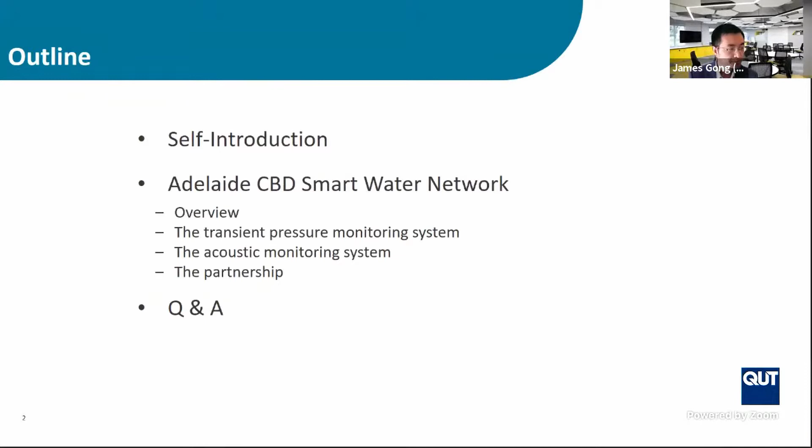So I'll start with some background information about myself. I did my PhD at the University of Adelaide and did my postdocs there as well. Moved to Deakin University last year, June last year, and have been here for just over 1 year. In terms of my background, my PhD was in hydraulics, in particular for pipeline hydraulic simulation and analysis. So that's water infrastructure, which is slightly different from the bridges and buildings most colleagues are working on.

Then I've done pipe condition screening technology during my PhD, and that has been commercialized through a company, Detection Services in Australia. And during my postdoc, I've worked with South Australian Water and also the University of Adelaide, developed a pipe break early warning system, trying to find early cracks on the water pipes so we can do something before they become big enough to burst the pipe and introduce lots of other issues. So today my presentation will focus on this pipe break early warning system.

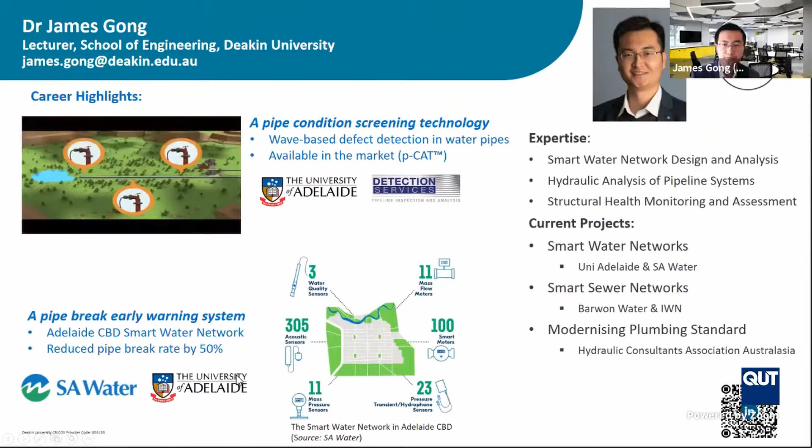Then before the technical details, just to give you some overview of the smart water network in South Australia. Some people may be aware of this. It started in 2017 officially, and SA Water invested more than $4 million in 2017 to set up the framework, and there have been quite a number of $1 million ongoing investments after that. So this is the smart water network in South Australia today.

So in the CBD, we have a quite heavily placed sensor network: flow meters, water quality meters, acoustic meters, pressure meters, etc. Then across the whole state, we also have some smart meters and some other water quality or other sensors for selected systems for different purposes. Some of them are related to structural health monitoring, some of them are more like water quality and some other purposes.

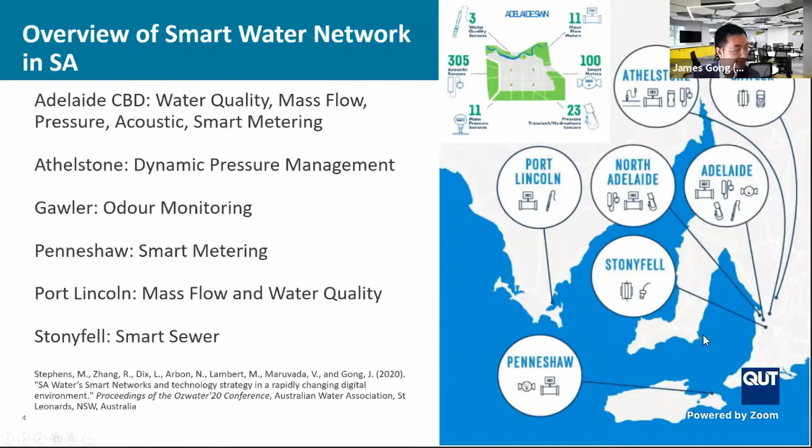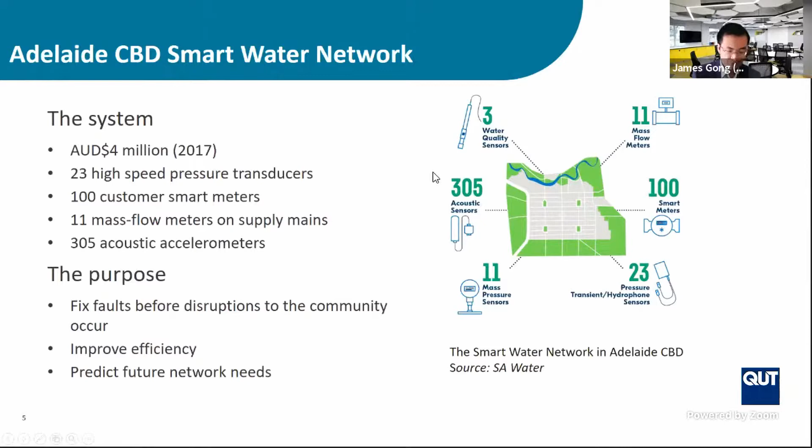So the system I have worked on is the Adelaide CBD water distribution system. And, as said, in this system, we have quite a few different sensing networks for different purposes. And the one I have focused on is this acoustic sensing system. So we have over 300 acoustic sensors installed in the CBD area, which is about 2 by 2.5 kilometers. In terms of the pipeline, the overall length is about 125 kilometers. They are basically wireless accelerometers, and they transmit data to the online server every day.

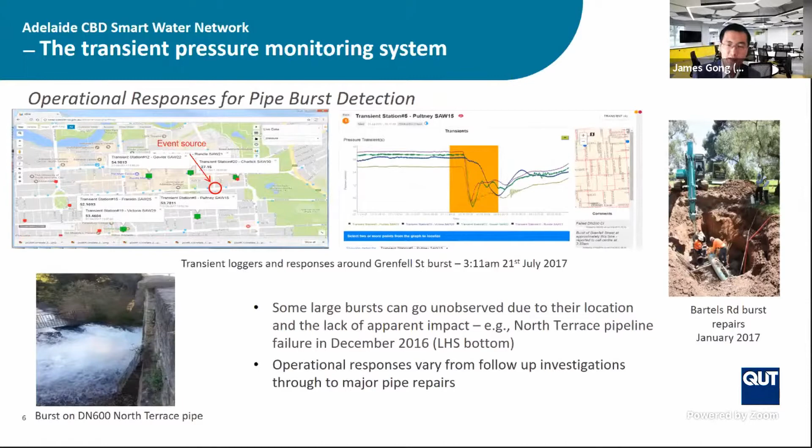Also, just a side view of the other system, which is related to structural health monitoring as well, the transient pressure monitoring system. So that's the high-speed pressure monitoring system. We have about 20 pressure sensors installed in this area, and the core purpose there is to detect pipe breaks or pipe bursts once they have occurred. So why I mention this is because this is something we consider better than doing nothing, but it's still too late because it detects bursts that have already happened.

Then the acoustic system actually serves the purpose of early warning of pipe breaks and bursts. So we want to find the early cracks, the smaller cracks, before they introduce pipe bursts. So this is more advanced. We consider this a truly preventative, or at least more preventative, measure than pipe burst detection, which is better than past practice, but still quite reactive because it's already occurred. We just know it as quickly as we can, then we do something. But here, what we're trying to do is really capture those newly developed small cracks so we can prevent the burst events.

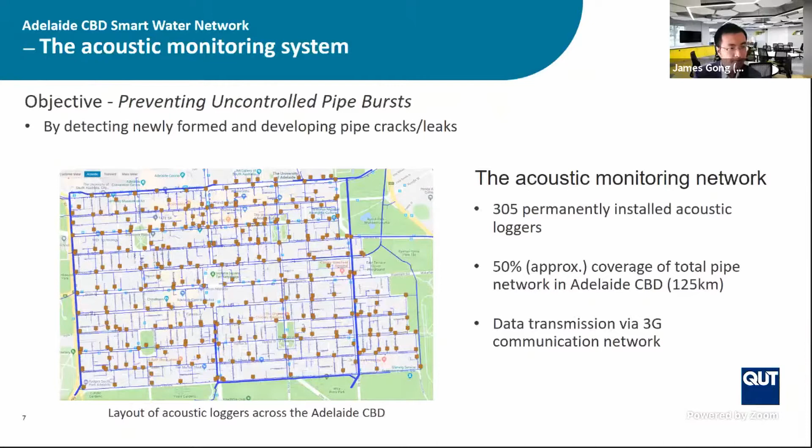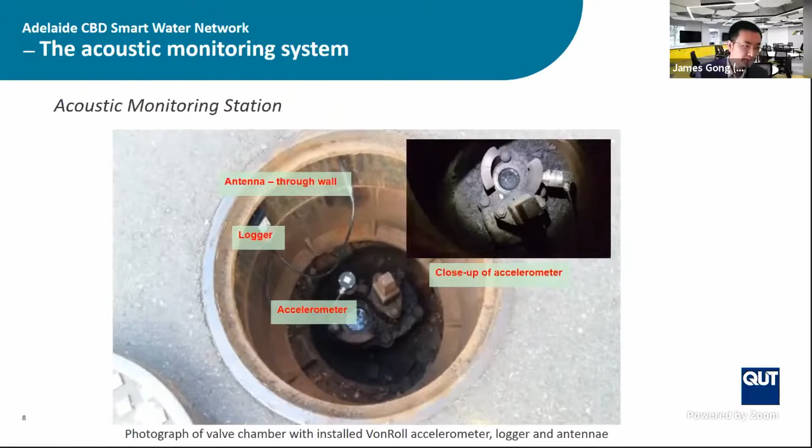And also within the system, it can generate some alerts or some alarms. What we found was the simple alarms generated by this product, off the shelf from a company, are not accurate enough, so you end up with hundreds of false alarms every day. So nobody can really cope with that. So then we as researchers get involved to develop the data analytics to really generate meaningful alarms for the operators to understand the system and to respond to the real cracks on pipes.

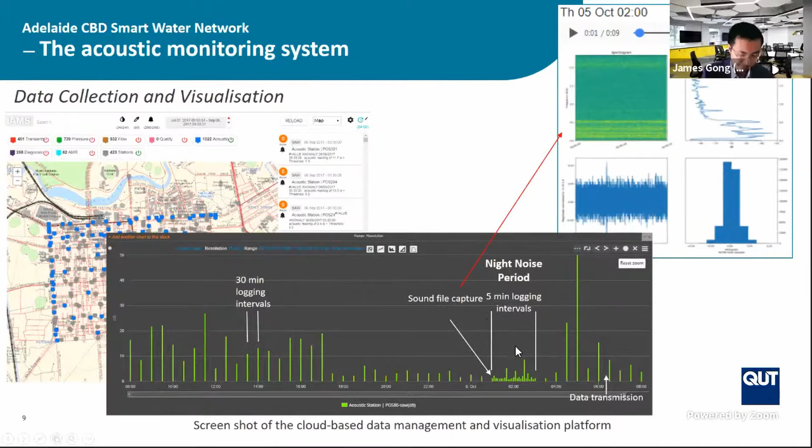And also at about 2 a.m. in the morning, we have 10 seconds of waveform, which is the raw data. So the waveform as captured by the accelerometers with a sampling rate around 4,800 Hertz, but only 10 seconds per day. So these are the data we are dealing with.

Then here we show you an example of the successful detection of a pipe crack. So in the background, that's a map which shows the location. If anyone is familiar with Adelaide, this is Hindley Street in the CBD, which is probably the very busy area in Adelaide City. And here we have a logger POS 14, which is the acoustic accelerometer. Then on the 22nd of July, we consider this as a normal condition, a background condition. Then on the 23rd, we see an increase in the frequency range. So when we do the frequency analysis of the waveform, we see an increase in the higher frequency components, and this continued to the 24th of July.

Then back to the dashboard, we have the so-called noise level as provided by the sensors. We see that up to the 22nd, the noise level was relatively low. On the 23rd, the noise level suddenly jumped up, and on the 24th, the noise level increased again. Okay, so this just shows the principles behind, which is quite straightforward. So we're looking for change, comparing with historical data, from both the noise level perspective and also the waveform, from the frequency domain perspective and the time domain perspective as well.

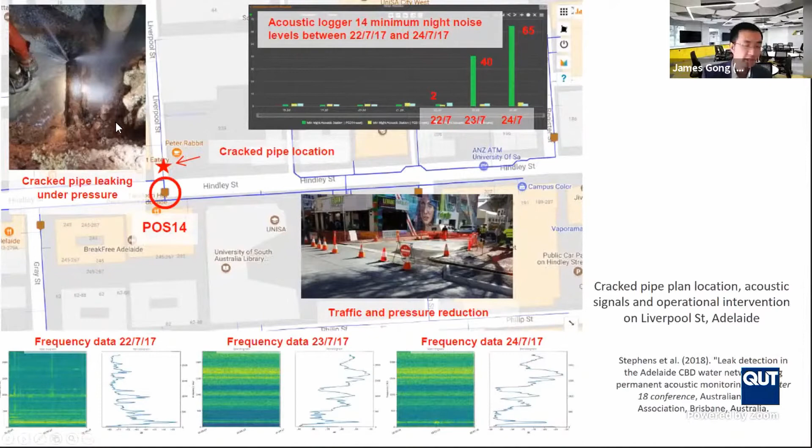So this is a summary of the performance. We've done the R&D for about 2 years, and we, as researchers and R&D engineers, closely monitored the system and developed an algorithm for them. And here we see we have prevented 45% of uncontrolled pipe breaks within this 2-year period. And after June 2019, this system has been handed over to the operational team in SA Water. So it's out of the hands of the researchers. It's truly transferred to the operators in the OCC, what they call the Operation Control Center.

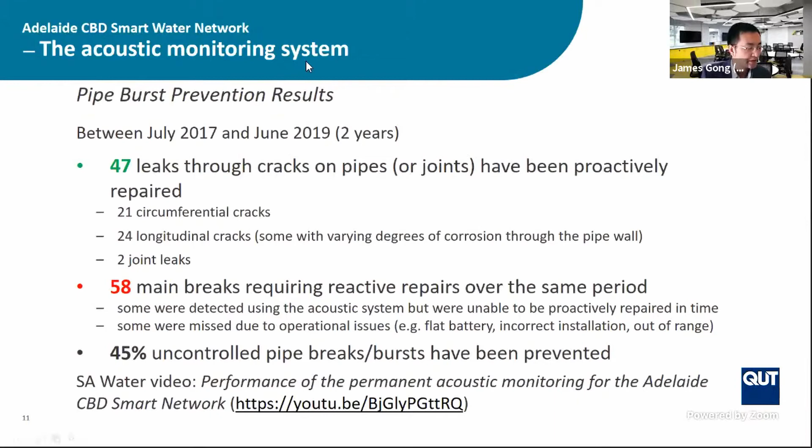And they only look at the meaningful alarms. So there will be only maybe 1 or 2 per day, not hundreds. And most of them are true alarms. So it's really practical now. We lost track of the success rate and so on, but we probably can get the information at some stage. The key challenge I didn't talk about too much.

Differentiating the real signals from cracks, from leaks, from other types of signals, especially in cities. In busy cities, you've got all sorts of noise. If you put an accelerometer in a city and just listen, you will find all sorts of funny things. People talking, singing, traffic, ambulances, you name it. So the challenge here is really to tell which is a real pipe crack or pipe leakage. So we generate meaningful alarms to reduce the number of false alarms, to make this system practical. So this is a key challenge.

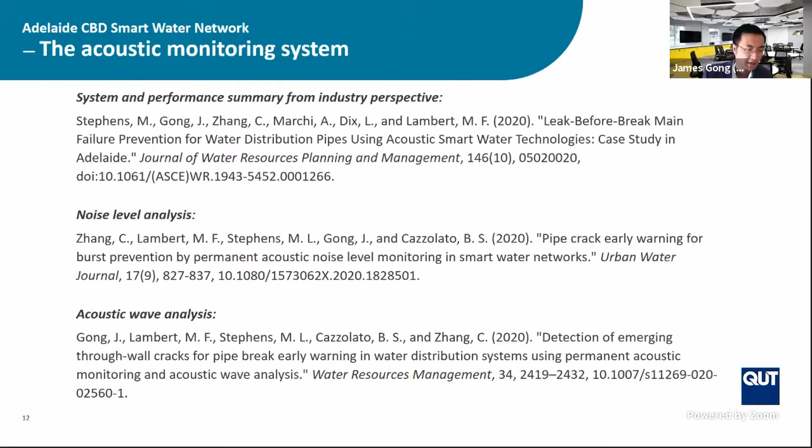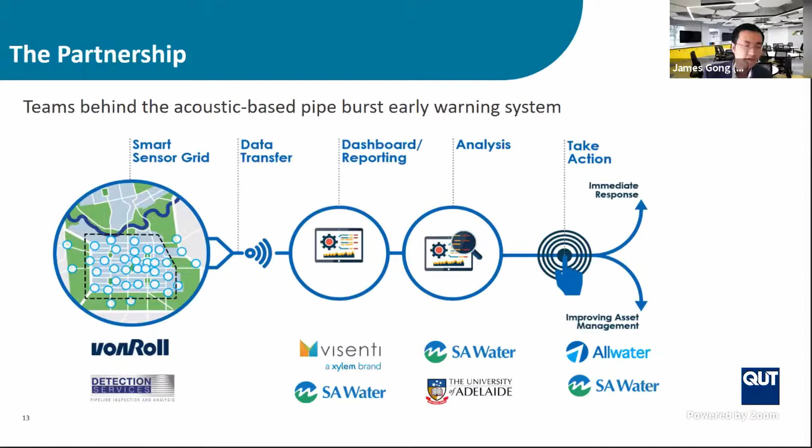For technical details, please refer to the 3 papers already published. We are publishing more papers, especially on machine learning-based techniques to further enhance the performance of the signal analysis. The last bit is partnership, just to briefly touch on this as time's up. This is a large project I'm presenting here today, but this is a group effort, lots of people involved, a $1 million investment. So not something a single researcher can do. So that's all for my presentation, and any questions are welcome.